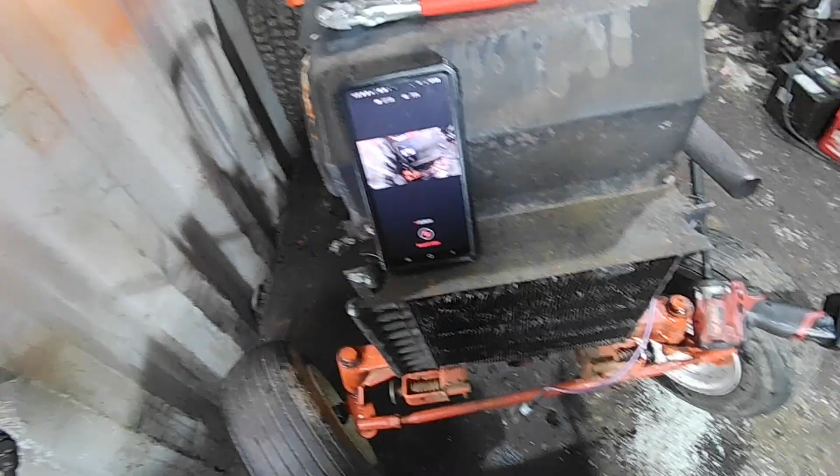Okay, today we're going to try to walk you guys through rebuilding and working on the Easy Adjust PTO clutch. This is the later version. This was brought out on most of the later 70s tractors and on forward until the electric PTO clutch. It's a pretty fairly simple design, but a lot of people get intimidated by it.

As you see, when we take the clutch apart, there's shims and washers and spacers, and they've got to be the right number, the right size, in the right order. And that could be part of the problem, people not getting their clutches adjusted and working correctly. So you need your parts manual and a parts diagram, and there is a service manual on this too. So we'll show you all that.

First thing to do is take your hood off. Don't think you needed to know how to do that. And then the coolers are going to be different for different years. Some are held on with screws and washers over here, and then some have bolts like this here.

This is going to be a little difficult because I'm using a head cam. I don't have a camera person today.

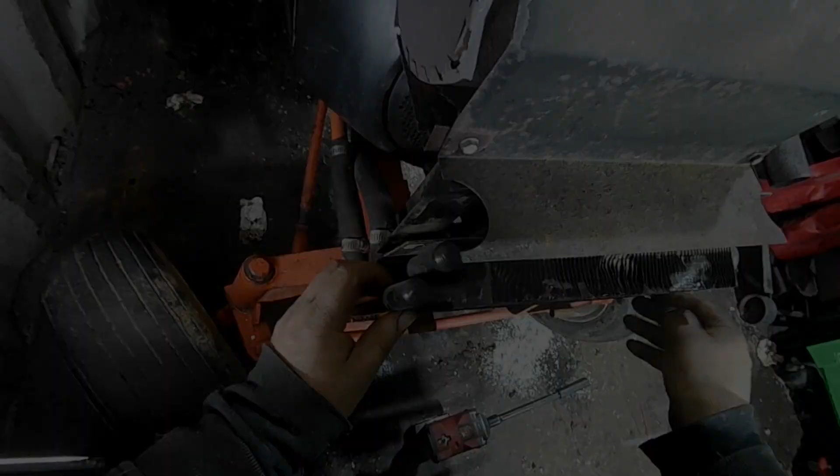Okay, so you don't need to disconnect these hose clamps over here. If you're changing your hydraulic fluid and plan on doing it, now's the time. You can disconnect this and get this really right out of your way. Now the next thing we're going to be removing is this upper bracket tower support. And there's different ways to do this.

You can get in here with the ratchet wrench and a wrench and do it. You can use a socket and a ratchet. And you can also use a wobble socket. And that's how we usually do them, wobble universal sockets.

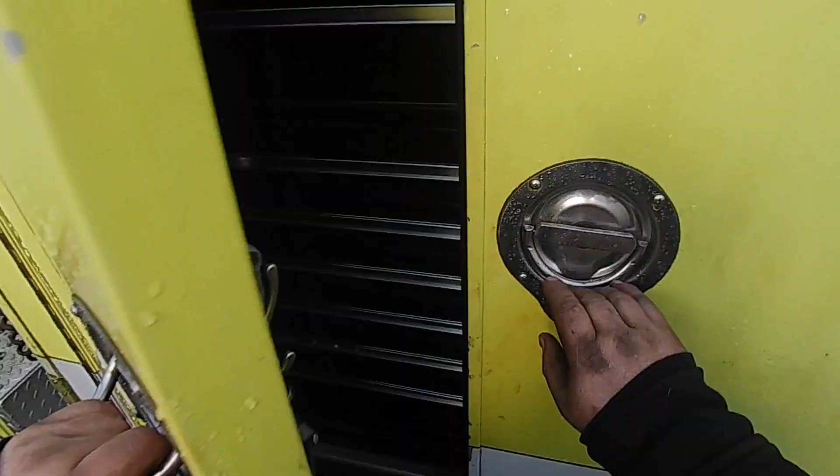So this is the wobble sockets we use to remove a lot of stuff that's tricky. And the extension, these are Sunex. They work awesome, lifesavers in a lot of situations, but use whatever tool you got at your disposal.

You don't have to take this all apart to get to this. For the video, it's going to make the lighting and everything easier, and it does make it a little easier working around here. But at this point now, you could go to the next step and start pulling this apart. But we're going to get this out of the way for the video purposes.

All right, hopefully you guys can see. I apologize again. Makes it a little tougher without a camera person, but all right.

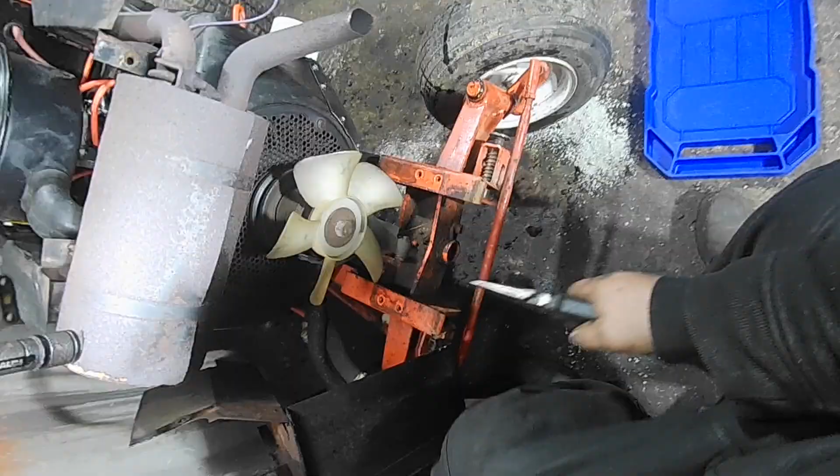So we got this shield and tower out of the way. Like I said, it's not necessary. It makes it a little easier. You got room, but doing it just to help get some light for you guys. So there's going to be a pin here that you got to pull out to get this linkage off.

Often there's a bushing in here that's got a lot of play in it. Can contribute to part of problems with PTOs. They get sloppy, the engagement in the rod. There's also, on this rod, underneath the tractor, a loop on most models that keeps this rod kind of centered. Otherwise, this will really go to the right or left, and you'll break things, and the PTO won't work if that's either broken or not there.

We've seen that often. Or this rod's not going through it. Somebody's monkeyed around with this, didn't put it back through the rod underneath. It's basically a guide is what it is. And sometimes these will pull right out, especially if the bushing's real bad. Other times they can fight a little bit.

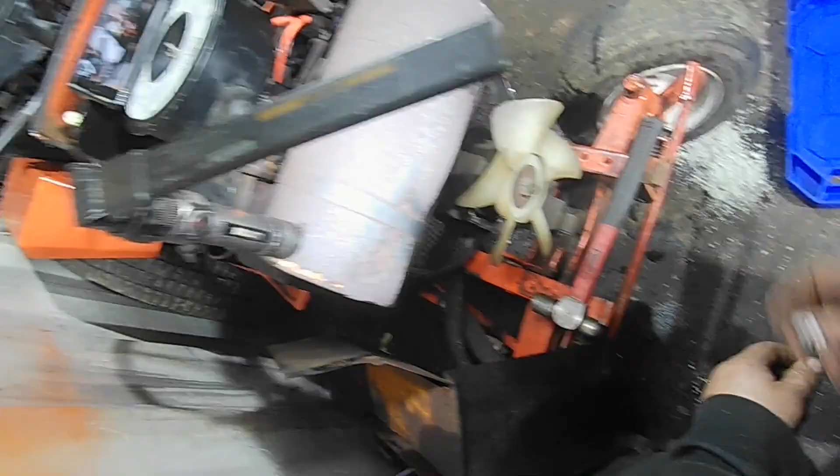The reason we're taking this one apart: when you start it up and run it and shut it off, the pulley spins here. Well, you can see it right now. It spins super easy. I should be able to actually start it up and show you. That's not a big deal. And you see it's still spinning after the tractor's shut off.

Those bearings are on their way out. Doesn't mean they're completely shot, but there should be a little resistance here. When bearings spin real free, there's no more grease left in them. And also, this is going to probably mean it's not set up correctly. The gap back here is what you go by.

Isn't real bad, but it wobbles. So it's not just some forward and back motion, but there's actual wobble. Those bearings are no good. The next thing is you're going to take this 3/4 inch nut off here. And the important part is, as you take this off, keep everything in order so you know how everything came off.

And saying that doesn't mean it was assembled right, because probably 60 to 70% of these we get in are assembled wrong. They're 20, 30, 40, 50 years old, and the PTOs have been messed with on most of them at some point in their life. And people don't always put them back together. Most of the time they don't put them back together the right way.

But by keeping it in order, by chance if yours is correct, it makes life easier. And if it's incorrect, then it also might let you know if you've got a problem with your PTO. It could be because something was put in incorrectly, or the wrong size was used.

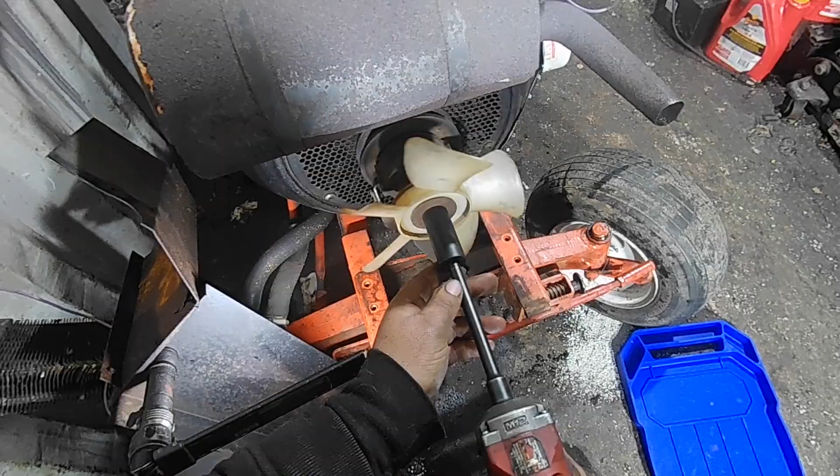So you got this big flat washer. This fan's actually in good shape. If your fan's missing blades, or they're real beat up, or they get brittle, replace them. Now's the time. But that one's in good shape. And we've got this spacer hub here. And then these are the spring washers. You can see them. They're domed.

So this lever is changing the distance between everything. And then it's putting pressure and compressing these. And the force of these spring washers is what gives you the pressure of everything. Then this is your big adjustment nut. So this is where the adjustment gets done. We'll do that towards the end of the video. But it's basically a nut inside of a nut.

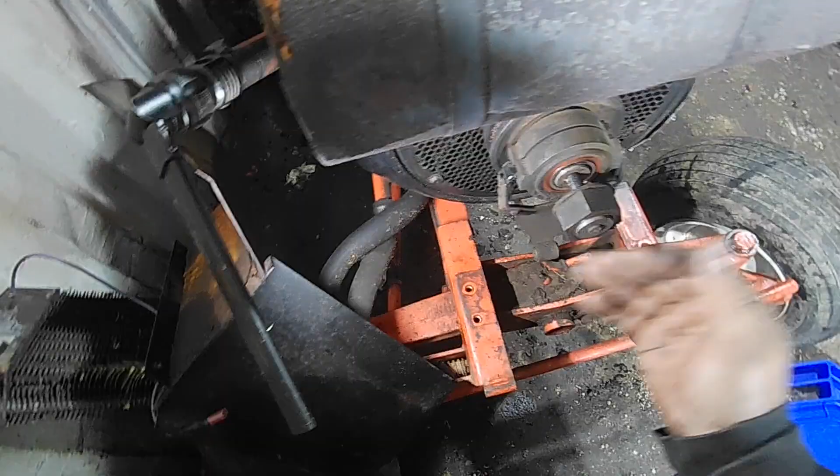And all the easy adjust clutches are not the same. Within each upgrade and year, model, generation, they've changed some things. They've changed spacers, they've changed thicknesses, they've changed the amount of things. So you really need to look at the manual that's correct for your tractor.

And with that said, it doesn't mean someone hasn't changed and put a newer or older one on. Also, a lot of the older tractors that didn't have easy adjust clutches, a lot of guys have upgraded to easy adjust clutches. So you got to kind of find what's closest to the one you have and hope for the best if yours isn't factory original.

There's this nut in here that's actually threaded that comes out through here, and this is where some of your adjustment comes from too. Well, most of your adjustment, I should say. When I said a nut inside of a nut, when you're adjusting, this slides in and out of here. And you got this big washer. A lot of times this will be worn. It is a spacer washer. This one's not too bad. It's got some wear marks, but it's actually not grooved.

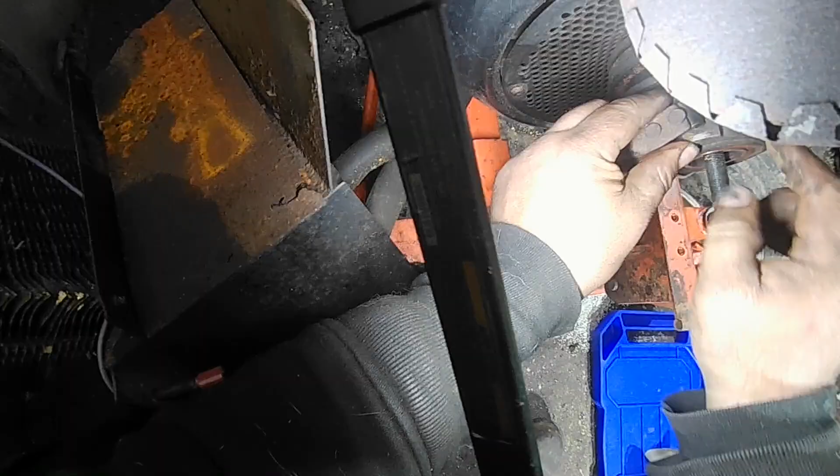It's pretty common that these will wear, especially if the bearings are wearing. But this one's actually not all that bad a shape. It's actually pretty smooth across. It looks probably worse than it is on camera, but there's 3 sets of bearings on these. There's a bearing in this one, there's a bearing in this one, and there's a bearing in your pulley. Those are 3 bearings.

These cams get offset. There's one side that's offset and one side that stays. So if yours are not offset on one side, then they're installed wrong and got to rotate 180 degrees. But right now we're pulling it apart. Note the way your fork comes off and make sure you put it back the right way from the way the book is. These people have put these in upside down numerous times and wonder why they don't work.

Alright, so here's our cam, and here's the bearing in here. So now I'm just gonna start a new pile. And then you got your shifter fork, or engagement fork, whatever you want to call it. So if these bearings are real bad, they'll wear a groove in this shaft here, and then sometimes you can't even get these bearings off here. They'll either weld themselves to the shaft, or the groove will be so bad you can't get them off. Sometimes you got to use a puller, but these are coming off all right.

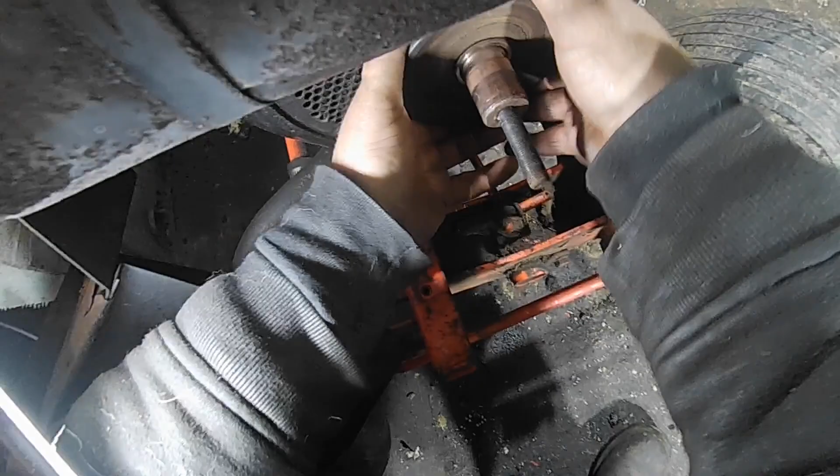Again, I can feel that they're a little bit rough. I don't think there's much grease at all left in these. Then here is your pulley, and note there's a spacer in here, and it's shined up, so that means things are moving in here. And like we said, you can see it, hopefully you can see it on camera. And when that was rocking, it was moving that bearing onto the spacer onto the other bearing, and they were wearing here, and probably took a couple thousandths off this thing, but we'll see.

And then sometimes these pulleys don't come off real well because the bearings actually wore the shaft. This one's not all that bad, actually. You may get away with being able to just get a little bit of lube on there and pull it off easily. Yep, nice. Alright. So, yep, this is the bearing that was shot.

That's spinning with no resistance. That means there's no grease in there. People will take a bearing and be, wow, that thing's good. No, no, it's not. It's good to blow up is what it is. It should spin easy, and there shouldn't be any inconsistency with the spinning and any roughness, but it shouldn't spin like that. It should have some resistance because the grease is in there. And as this is spinning, I can feel there's a rough spot or a worn spot.

So there's your pulley, and the pulley itself actually looks in good shape. These can get worn and distorted, belts wearing, belts sticking, somebody hitting something with an implement and not shutting the PTO off, and the belt will actually start wearing the metal. Usually the belt will break too, but these will wear.

And here's your friction disc. This is what does the driving. This disc's actually in really good shape. It's bonded here, glued here to this pulley. So we're not going to mess with that. There's a lot of life left on here.

And then here's your hub that bolts to the flywheel, and your clutch rides on here. And this is going to wear. They do. That's what happens. But they'll wear quite a bit. This one's barely worn. I can run my fingernail over it, and the reason it's wearing uneven, again, is because that pulley and bearing was bad and it was walking. So it was engaging and putting pressure on one side more than the other, and it should be even and equal. This we'll just clean up, same thing, maybe some emery cloth, sandpaper, just to rough it up a little bit and get it cleaned up.

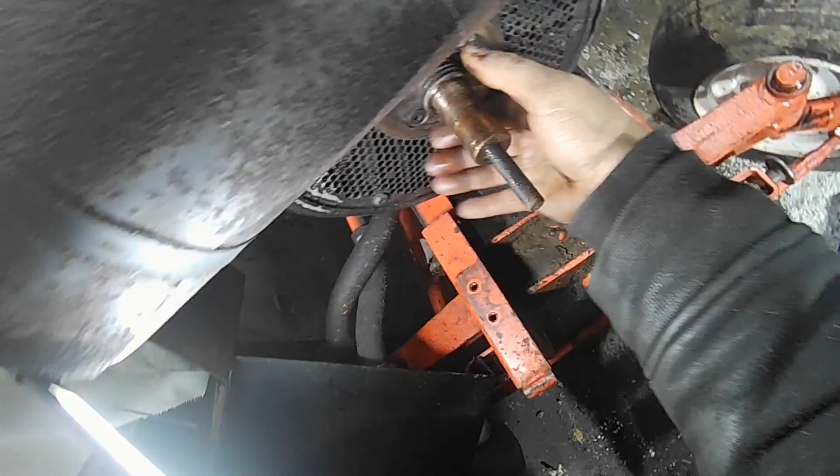And this next step is pretty important too, to see what you got going on here. These are spring washers, wavy washers, and shims in here. And this also is putting pressure when everything's expanded and compressed. This is putting pressure also on the whole system. So basically those big washers have to overcome the force of these little washers, these spring washers. So those big cam washers we were talking about have to overcome this, so that disc pushes up against here enough and the friction disc rides on there.

Why it's important that these are in the right order, the right number and right thickness, is because when compressed, they have to take up the gap in here and just leave just enough so your friction disc hits here. If there's too many in here, you can compress everything all you want, but this is gonna be too big of a space for this to ever hit the disc and drive off your flywheel, or off your hub, I guess is probably a better way to put it.

So if there's too many, no matter what you do, you can put all the pressure you want in the world. These are only going to compress so much, and physically can only compress so much. This will be too far away from the disc. And again, if there's not enough, then you're going to have problems, and this is going to walk back and forth, and it's not going to engage and disengage like it should. It's real important. That's why the thickness, the number, and the order everything's put together makes a huge difference.

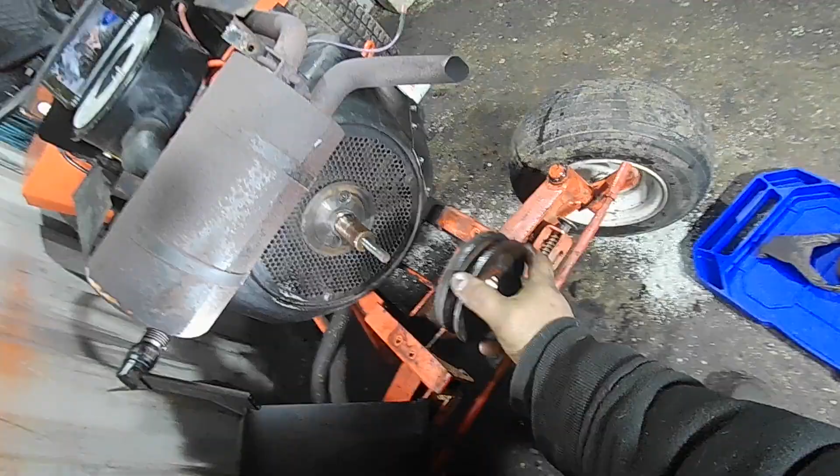I'm going to guess these might be pretty close to the way they should be. I'm just thinking that the bearings probably were not replaced. Somebody looks like probably put a disc on this at one point. The discs won't wear a lot as long as they're adjusted right and you're not doing a lot of dumb things. You start running firewood through a snowblower, this is what spins and gives. You might spin a belt or break a chain or something, but still, if that blower gets locked up, this engine is not going to slow down and stall. This old engine's got plenty of torque, and that's going to keep spinning. And if this is stopped, you're going to wear the disc out or wear this out.

Same thing with your lawnmower. If your blades don't go on instantly and stay at full speed, and they're slowing down gradually, it's because, more than likely, this is spinning. So this is not adjusted right, and you're not getting enough pressure on here. So the only time this thing should really wear, pull that lever to go and engage your implement, and this grabs for a fraction of a second and it should lock right in.

So this disc should last a long time. If they're wearing out, something's wrong and you're not adjusted right. This will still drive your implement at a very fast speed, but it'll be slipping and you won't really tell by the eye until you get a heavy load on it.

I've seen people go in high grass and the engine doesn't bog down or anything, and the blades are slowing right down, and they just keep on mowing and it comes out of the grass and the blades pick right back up in speed. Well, this thing's spinning so fast and you do have some friction material here. Yeah, it's driving, but it's not driving like it should. That's spinning way faster than this is, and you're just wearing it.

Same thing with blowing snow. If your snowblower is set up right and it's not throwing snow pretty far, especially dry snow, you should get 15 to 30 feet throw with a single stage blower, no problem. In dry snow, as long as you got it adjusted right and operating it right. If not, something's slipping. Chances are this is not adjusted right.

Blabbing about people not operating things, because we can make videos for 3 years and not cover it all.

So this has got a big spacer. Then it's got a small spacer. Hopefully you can see all this. Then we've got a wavy washer. I don't know if you can see that, but that's the spring washers, wavy washers. Got another one. And we got a spacer. So that's correct for most models. Then we should have 2 more wavy washers, which we do. And then a spacer. We do.

Now the key is making sure these are the right thickness, these spacers. And we'll have to look at the book. And 2 more wavy washers. So that looks like it was put together correctly, if memory serves me correct. Got everything set up there.

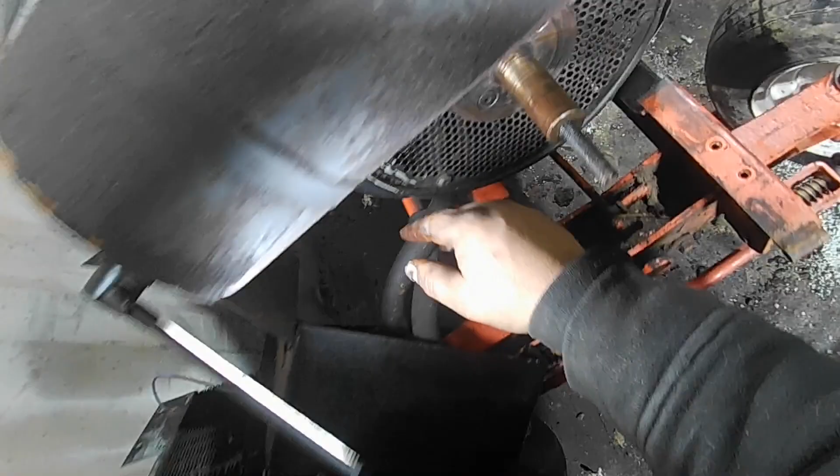We'll clean that up. Alright, so one of the first things we always do, and we do this with any sealed bearings, doesn't matter if they're going on these garden tractors or heavy equipment, farm equipment, trucks, stationary equipment. Bearings today, I don't care what brand they are, you can get Timkens, SKFs, American, Chinese, it doesn't matter. 90% of them don't have enough grease in them.

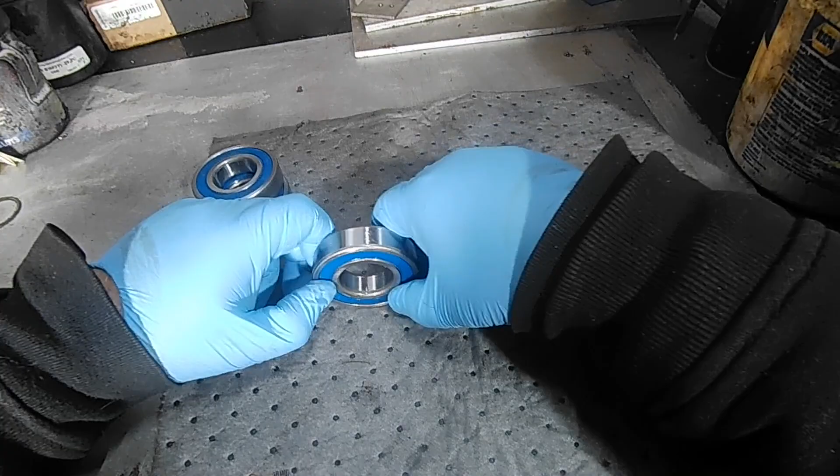We always just open these up, even though they're sealed bearings, you can open them up. We put good grease in them and then close them back up. We do this with every single sealed bearing. So they're very easy to do. You can take an O-ring pick or whatever you got, and you just go underneath the lip seal here, and you pry up. And that's it.

Now you look in there, hopefully you can see. There's grease in there, but there's not a lot. Right here, it's dry. These bearings are dry. I'm sure if we flip it over and do the same thing, it's going to be dry in spots. And once they get moving, sure, they'll get coated and they'll last a while. Just pop these open and try not to damage the seals. And again, look, there's not much grease in there. It's dry here, it's dry here, it's dry here.

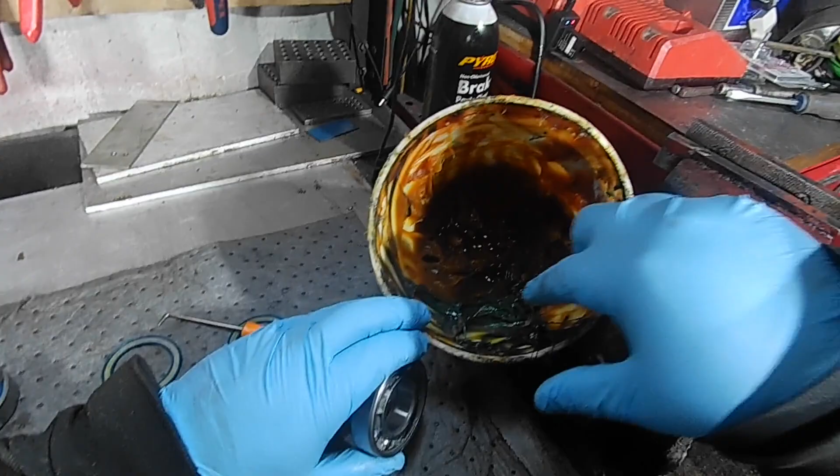Alright. Don't pay attention to the bucket. It says Napa grease, but it's not necessarily Napa grease. Instead of wasting the grease tubes, when you get done with our cordless grease gun, there's always a little bit of grease in there, and we'll just empty them off in here, put a lid on it, and it's plenty good grease. We use a lot of Schaeffer's grease and Red Line grease, and they're both pretty expensive, anywhere from $10 to $20 a tube. So if you can save some.

I'll just get that pushed in there nice. You don't have to go crazy. You don't need to do the palm of the hand method because there is already grease in here. Apply pressure as you're putting the grease in, so it just gets packed down in between. I'm not going to go through all three of them with you. Just wanted to show you the basics. And then just take your seals. Make sure you're right side down.

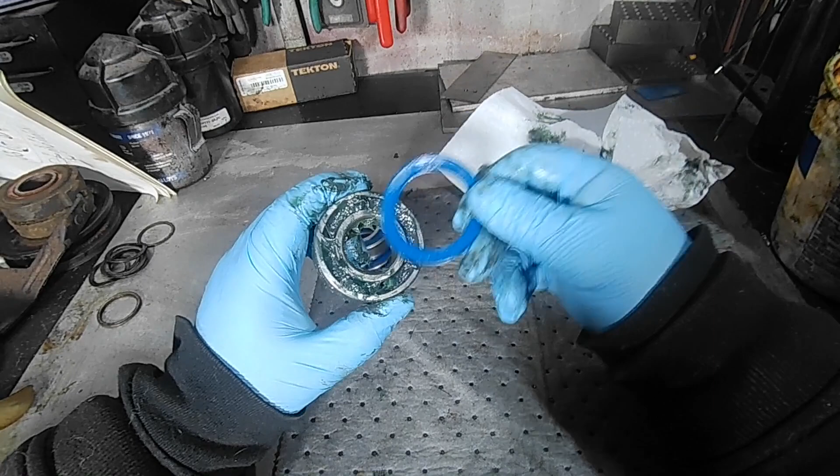And you just press them in there. Just walk them around with your finger. That's it. You can see it push some grease out this side. And then this is going to force the rest of it in between the bearings. Just make sure it's in there and doing its job to keep the dust out and the grease in.

Again, when you take them off, just be careful not to damage the seals. And now this bearing will last the customer much longer. Okay, so now we're going to show you how to knock out these bearings. You want to clean these things up here pretty good. That way none of the grime and stuff falls in when you're taking the bearings out, putting new ones in.

They can only go one way. I'm not sure if you can see that, but this outer lip retains the bearings on this side. On this side the bearing protrudes. This is the side the bearing has to come out. You can't knock it through this outer lip. So the bearing has to get driven down. Sometimes they'll pop out by hand, not a big deal. And other times they fight.

And if they do, usually they're not in there too bad. You can put them in a vise or whatever. If you put them in a vise, just make sure the bearing has clearance to drop and you're not driving the bearing down on the vise. And you want to be mindful that you don't break these ears or crack any of this.

You can take a piece of pipe or a big socket and drive on the race if they're in there hard. If not, usually you can get away with just tapping them. And they come right out. Make sure this lip is clean because the bearing has to sit flush in there. If you need to take a pick or a screwdriver to get any grime out of there, do it.

Pretty straightforward. And then take your new packed bearing. You can spray something in there, it doesn't really matter what, just to kind of protect it. So if you ever have to pull these out again, they come out nice and easy. WD-40, penetrating oil, a little bit of grease, anything. Motor oil. Sometimes these drop right in like that.

If they don't drop in, you can gently persuade them with the hammer, but the key with putting them in anyway, you want them to go in flat and level. If they go in at an angle, they'll jam up and they're not going to go in straight, and you'll damage them and they'll fight you. So you want to make sure this bearing is sitting as flat as can be

from side to side. And then you can either tap them in with the hammer if you need to, or if they fight a little bit. But make sure your bearing is straight from side to side here, that this clearance is pretty close. Obviously you're not going to get it perfect, but you want it to be close all the way around.

Then you can put it in a vise and just press it in if you need to, or a small press. Usually though, these will go in by hand or with a hammer tapping them. These bearings are the same both sides, so it doesn't matter. You can put the bearing itself in any way. So those were the easy ones.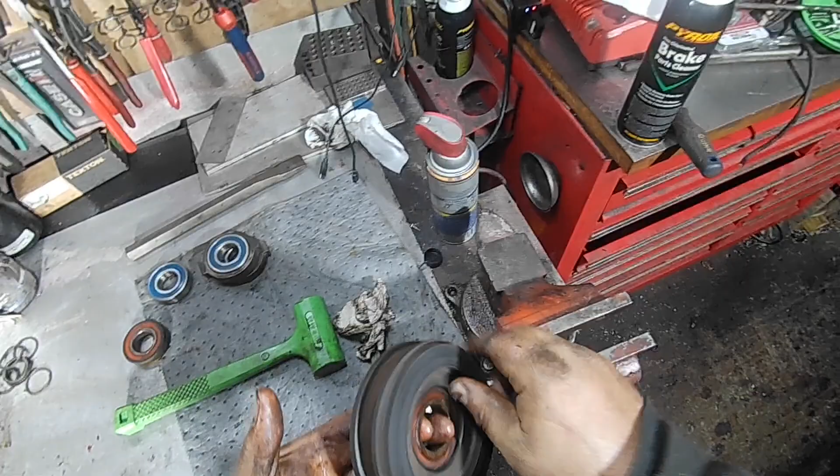This is the bearing that I think is, well, I know it's shot. It had all the play in the shaft, and you can just watch this thing spin around and spin around and spin around. I mean, that's very little effort to make it do that. Alright, so again, we cleaned this up already.

Your bearing's only going to be able to go in from one way. This bearing gets knocked out through this side. As you can see, this side, it can't come out. All it's showing is the seal. It's retained by this. So this bearing gets dropped down away from the friction disc. Again, make sure whatever you're hitting it against, you've got enough clearance for the bearing to drop and you're not hitting it on the jaws of the vise or whatever you're using.

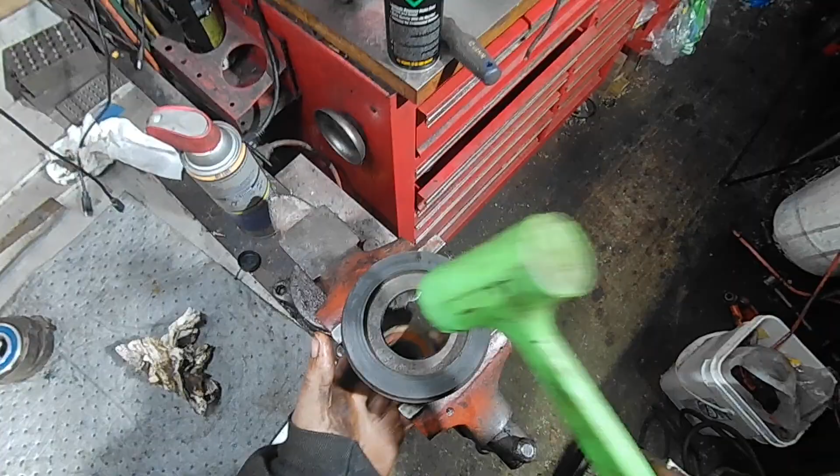And we'll see how this one pops out. This one's going to drop right out too. Not a big deal. If they fight, you might have to use a block of wood or a big socket or something. You just want to be mindful not to get any grease on this face. Brake clean's fine, but you don't want any grease on your friction disc there. Again, this lip, this face has to be clean so the bearing sits in there flat.

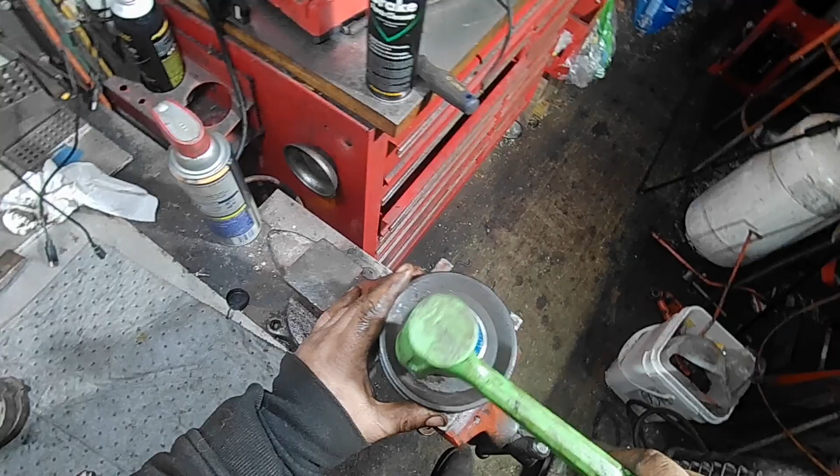A little bit of something in there, just to ease the installation and keep the rust away. Again, be mindful not to get it on the bottom where the clutch disc is. You want this bearing to start as even and level as you can from all four sides. And if you go hit them in with a hammer, better to do it with a softer faced hammer, dead blow. Hit it 12, 6, then 3 and 9. You don't want to hit all kinds of crazy things. You want to work them evenly, and then you can go around if you need to.

Now that it's down in there, you can do that. And that's it. The bearings are installed. That part's simple. Just make sure it's even on the back side. She's all the way down. So now I'm going to try spinning it like we were before. And you can watch. It doesn't spin nearly as much. Actually, quite a bit more force to do it. Before on the tractor, she was just spinning and spinning and spinning.

The housing looked good. We inspected that to make sure we weren't getting any wobble from wear in the housing and whatnot. The wear was actually coming from the bearings being worn. You can get wear in the housing or the outer races or the inner races of the shaft, but the wear was from the bearings.

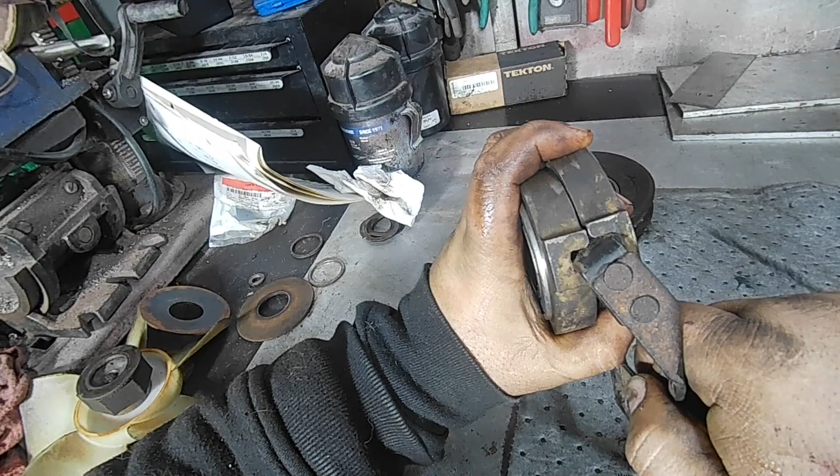Okay, so a couple things while we got this on the bench I wanted to show you. A few things you want to be mindful of. These edges of this fork should be rounded. They should not be squared, because this fork pivots, and it pivots in these cams. And when it's pivoting, it moves, so you want that to be rounded. You want this fork end to be rounded a little bit, not horrible, but definitely a little bit. These here are kind of straight and square, but this is what's moving, so that's where you want it to be rounded on the edges.

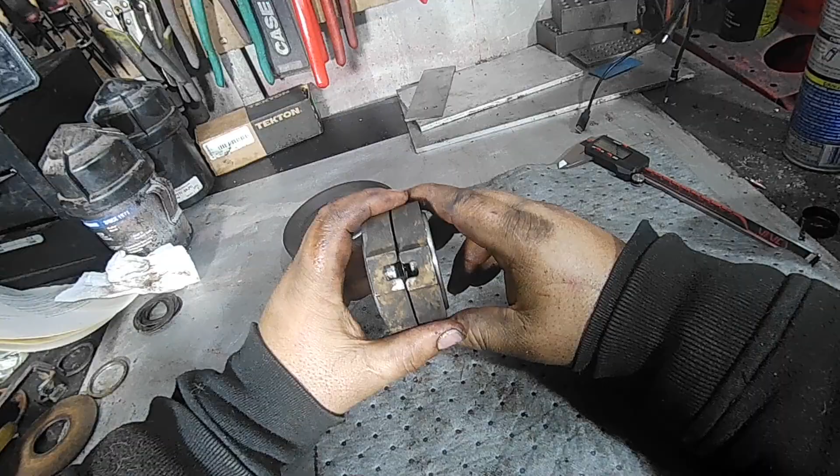Another thing, these need to be parallel across here. They can't be bent. They need to be parallel this way as well. Just something to keep in mind. You want to make sure you got a good bushing in here. If not, replace it. These, you don't want them too egged out. These are getting a little bit worn, but not horrible. They'll tend to wear in the corners, and you don't want them to wear in the corners too much, or this gap in here to get opened up and worn. But these should be absolutely fine. They're not brand new, but they definitely got life in them.

And then again, we're going to clean this friction disc up real quick with some brake clean, a little bit of sandpaper, emery cloth, just to rough it up a little bit. You want to get all grease and oil and contaminants off of there. You want this all cleaned up in here too, where your belt rides. You don't need to smooth it out too much, but you want it nice and clean.

Alright, so a few things I wanted to point out. Here's that clutch linkage rod. Here's this piece I was talking about that guides this rod that goes into your forks. Your forks here, here's that bushing I just showed you. So here's that loop. This rod has to be in that loop, and that loop shouldn't be broken or missing, because this rod will go back and forth. It'll flop all over the place. It'll screw up your forks, your engagement, everything. So you want to make sure this rod is riding through this guide.

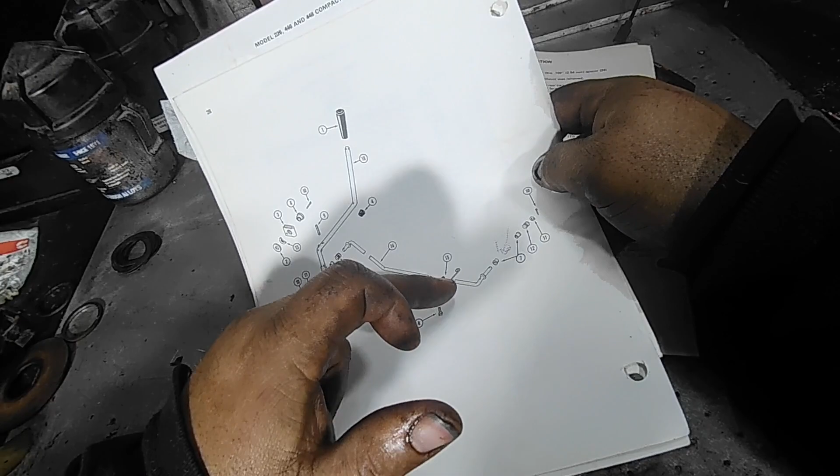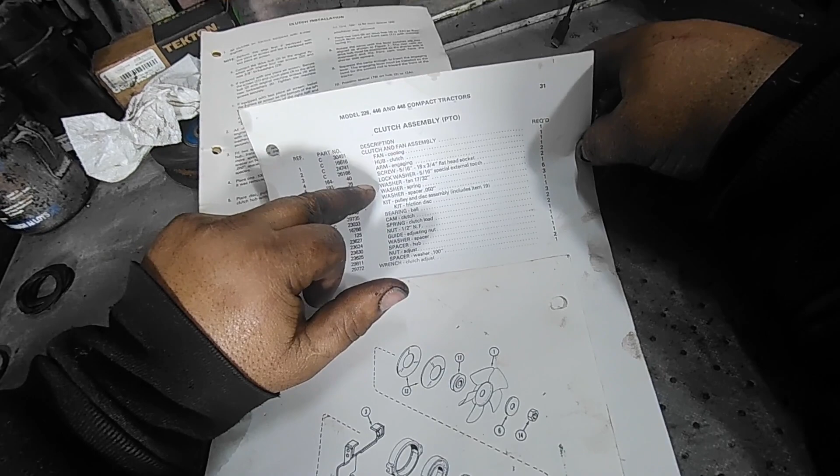Alright, and here's the breakdown for this particular year, the later series 448 late model. Each year, some of these components can be different, and they also can be different thicknesses. So that's why you need the parts breakdown for your particular year. It's very important. It'll show you the size, the spacer thickness, how many are in there, etc. This is a service manual for this clutch, and just to show you, it's going to be slightly different, because this is for a different year.

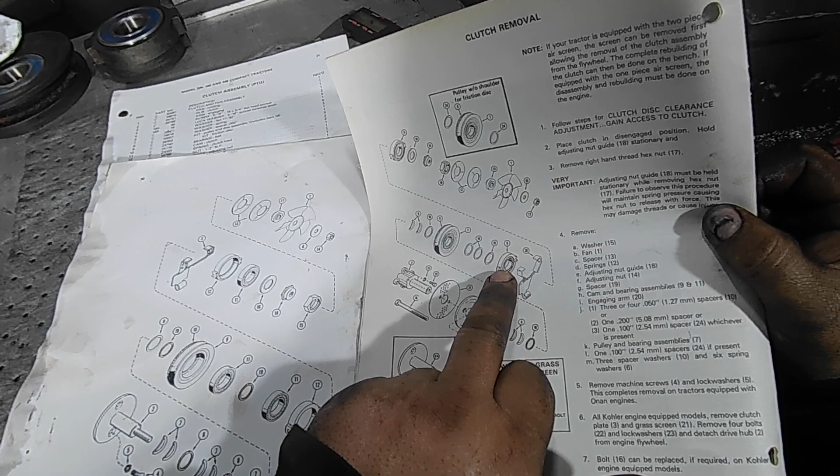If you look at this, behind the fork you got your bearing, and this is showing 3 spacers here. And in this repair manual, it says 3 or 4 at 0.05, or 1 at 0.200, or 1 at 0.10, whichever is present. Well, yes or no, because if somebody assembled it wrong or put the wrong kit in it, you're up the creek. So you're better off going to your year parts book. This year parts book's only showing one spacer in here, and that's number 19, and that's showing at 0.100.

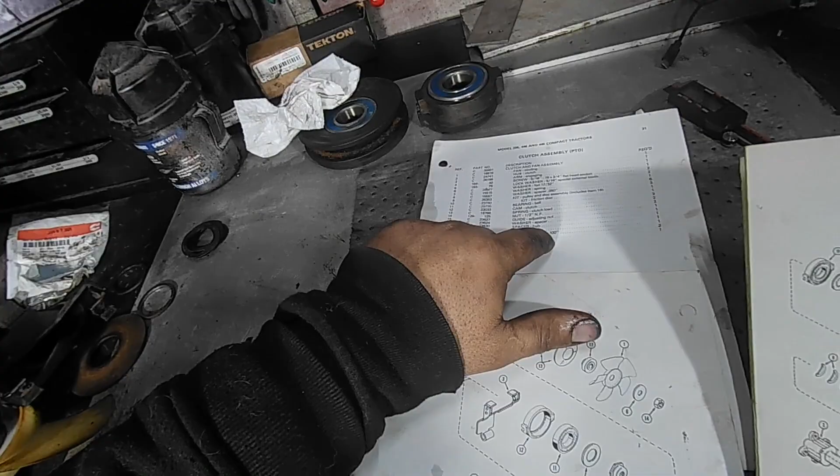And these change through here, just to give you an idea. So sometimes the spacers in front and behind here, these heavier ones, are going to show being different. The point is, get the breakdown for your particular year clutch. Okay, now we're going to go back to assembly.

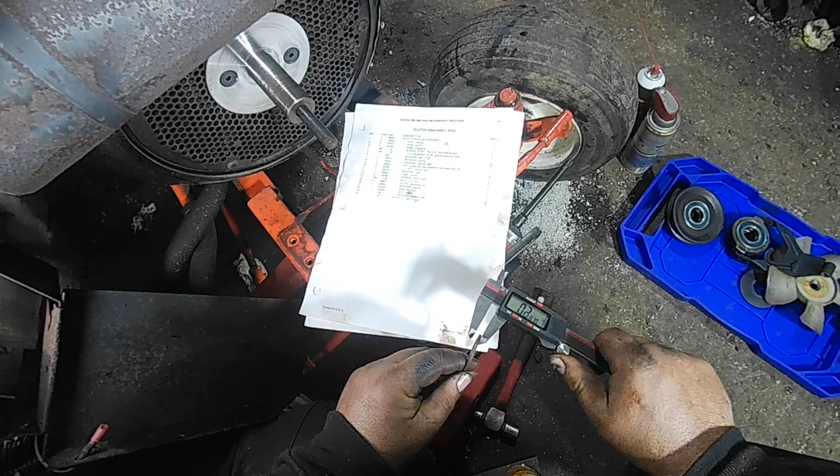Alright, we already went through and took the calipers and mic'd out our spacers, make sure they were the right size. We inspected all the parts and everything, spec'd out and checked good. So it's important you do that. If you are this far, we do recommend just replacing these spacers and wavy washers. These are actually okay, and they've got a lot of wave left to them. And then this wasn't the issue. The engagement and spring pressure and stuff was fine. And these spec'd out fine, so they're not worn. They're still straight. So we're going to reuse them.

This I don't think was the original set for sure. I think somebody's been in here. I just don't know if the bearings were cheap bearings. They didn't grease them, didn't replace them. I'm not sure. Either way, everything's spec'd out, so we're going to reuse everything, and all we do is replace the bearings. But if you're going this far, I'd order a shim kit for these with the wavy washers and the shims in there at the very least.

And those big clam washers, spring washers, those are good to replace sometimes too, depending on how much wear you got. But we're going to go back and start putting everything together. We've got it all kind of laid out how it needs to go. But we're going to follow our procedure here because that's the best thing to do.

If you notice, we cleaned this up here. So it's all cleaned up. It really didn't take much. The shaft wasn't really scored very bad or grooved out. Neither was this, just slight, but cleaned up. We didn't take it on a lathe or anything.

We're not going to show you the unrecommended, unsafe procedure of running the engine at an idle and lightly applying a piece of sandpaper to it, because it's dangerous. You can lose a finger, lose an eye. Definitely not the procedure we'd recommend you doing. Just do it safe some way. You could just take a piece of sandpaper with the engine off, and just go back and forth and clean it up. Or a die grinder with a Roloc or a Scotch-Brite pad. Those are good safe ways to do it.

Alright, now we're going to go through our assembly here. Let's see what we can get done. I'm sorry about the angle again. I don't have a camera person right now, so we're starting down here. But we already got our hub on there. We didn't mess with that. So it's showing 2 number 7s, and on here the number 7s are the spring washers. So that's what we're going to do first.

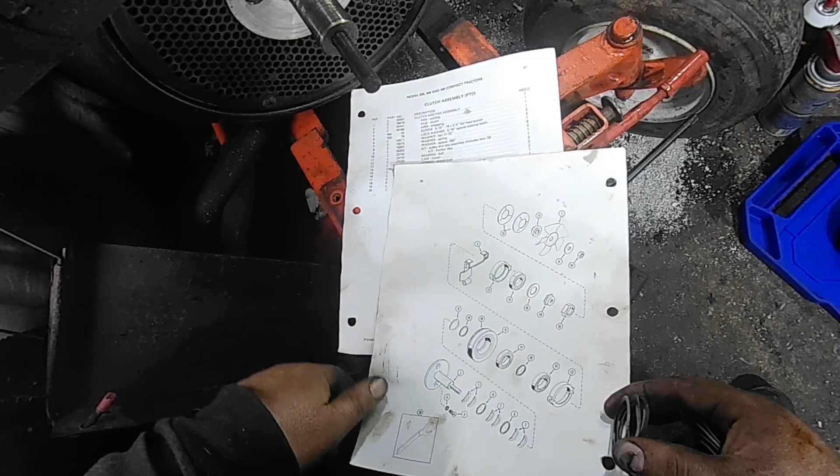And we took apart and cleaned all these off. You want to make sure these are clean. A couple different reasons. A, if they got stuff on there, it'll affect the clearance and tolerance in there. B, if there's grease and stuff on here, it'll get hot and it could melt and get onto your surface and your friction disc and affect the way it works.

Alright, so we're going to have 2 wavy washers here. It's 2 number 7s. And if you notice, they've got the waves in them. And I try to put the high points against each other, if that makes sense. Instead of having them fall in to each other like that, what I do is I try to put them against each other. Got our 2 wavy washers. So I want one of these, which is 0.05. And then again, we're going to go with 2 wavy washers.

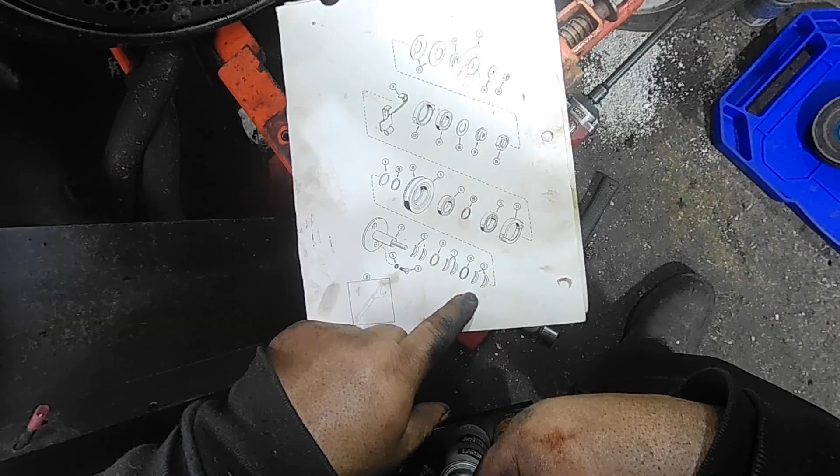So this is where we are now, right here. Again, I put them on with their high spots. And then I want one of those 0.05 spacers. And then we got 2 wavy washers left. So the last 2 wavy washers go on. And now we need to pay attention. We've got 2 spacers left. There's one thick and one thin.

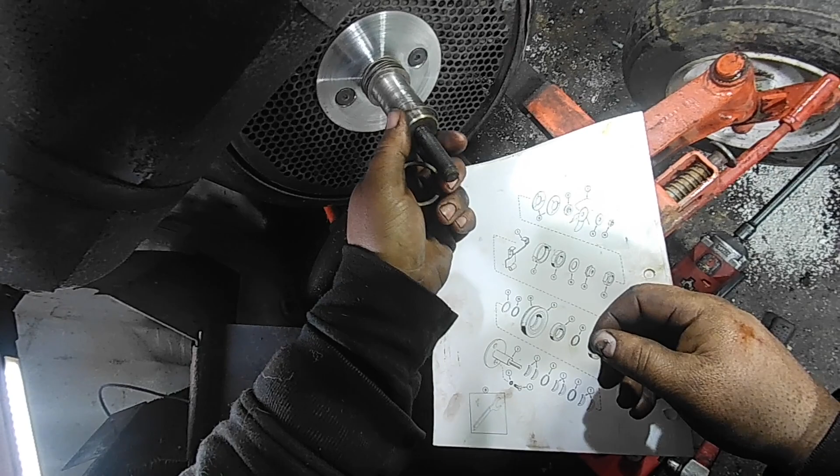So the thin one goes up against the wavy washers like it has been. Then the thick one goes. Alright. So 2 wavy washers, thin shim, 2 wavy washers, thin shim, 2 wavy washers, thin and thick shim for this particular year. And we've got our clutch disc here. So all we did was just take a little bit of sandpaper, emery cloth, by hand, roughed it up a little bit so it's got a nice rough surface to grab onto there.

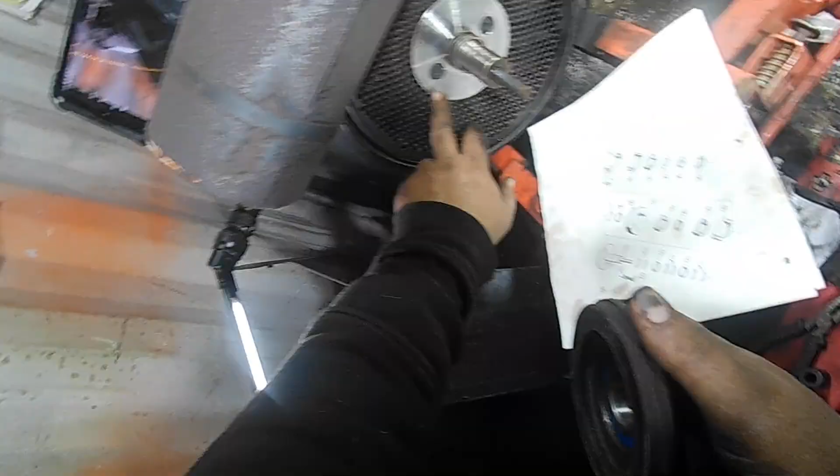Now when you're inspecting these, if these are glazed over, they're no good. If you're able to get the glaze off with some sandpaper and keep the surface flat, so you put the sandpaper down and rub this back and forth on a perfectly flat table or countertop or something and get the glazing off, it'll be fine. Same thing, you don't want the hub here over glazed. Usually a little emery cloth or sandpaper will clean up that hub.

Okay, so now we're on this step. The clutch material faces the flywheel and we're up against those washers. So now you can see how this works a little bit. When you're pushing the spring, those wavy washers are preloading it. The wavy washers keep this off of here when your PTO is not engaged. So it's like a preload. And then when you engage it, those big clamshell washer cam things put more pressure than these washers can hold and let that disc grab the front of the engine.

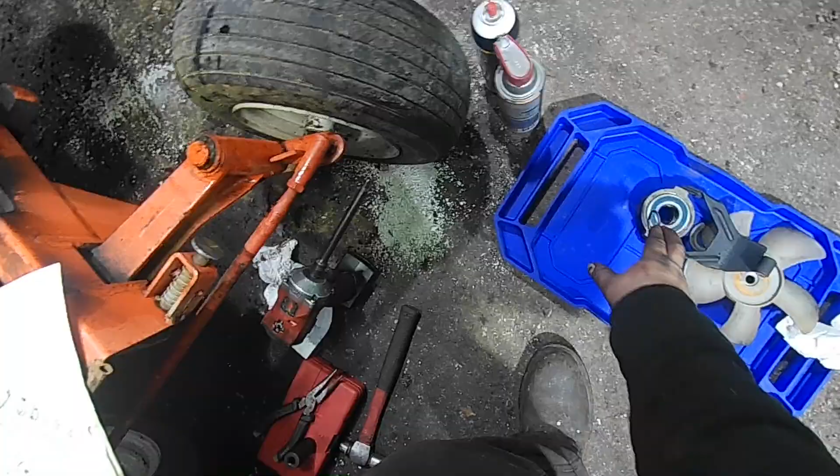That's why it's important that you use the right amount and the right thickness shims and washers in the back, so this can actually reach the flywheel surface. Well, we'll call it a flywheel surface, but it's really just a hub on the front of the flywheel. And then next, we've got one of these thick spacers, and that spaces between the 2 bearings. You got the bearing here and then the bearing on the forks.

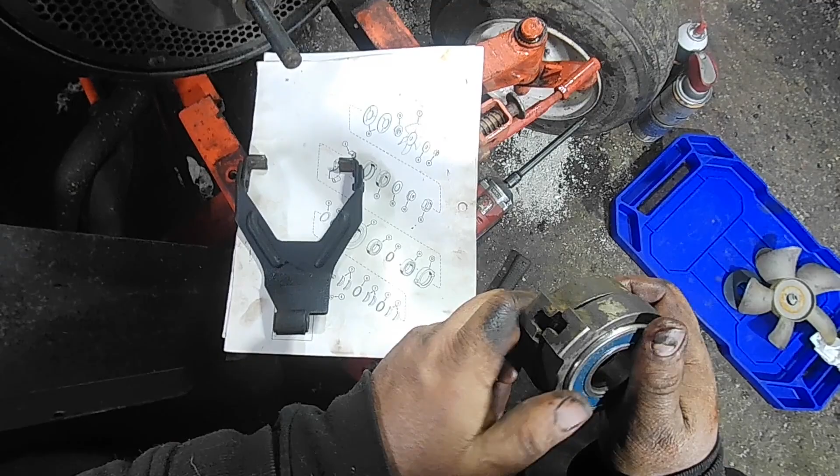Okay, so next we're here. We got the bearings already installed, our new bearing. This is going to be a little hard to show you, but we're going to do our best here. So the back bearing holder, the cam here, if you look at this side, it's lined up. This side's offset. That's what you want. If you take this and spin this around, this side's lined up and that side's lined up. That is incorrect. It won't function.

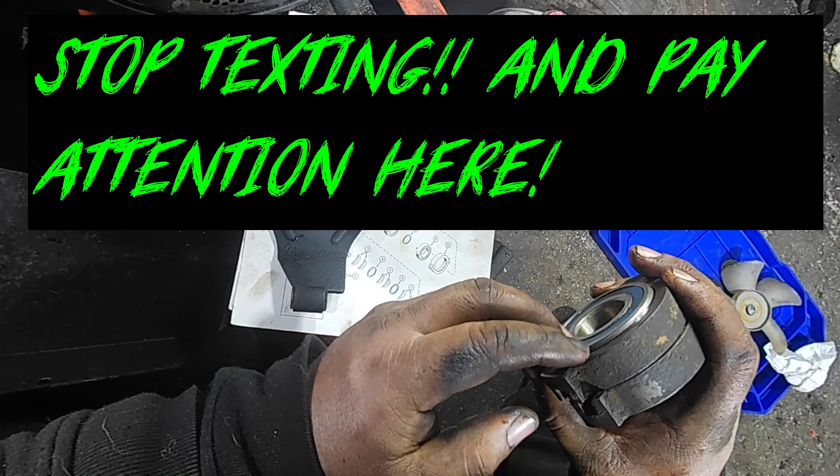When they're mating to each other, one side has to be offset. So what you do is you take one, you spin it 180 degrees. Again, you mate the flanges up to each other. And now we've got one side that's offset, one side that's not, and that's what this shifter fork does, and that's how it applies the pressure. Now what you want is the bearing holder in the back, the side that's offset, you want the back one lower than the front one. So again, this side is lined up, this side is offset, this one is your rear one. The back is lower, the front is higher.

Since we cleaned this up, right before this step, it doesn't hurt to put a little bit of spray on the shaft here. It doesn't hurt to put a little something on there, plus it'll keep the rust off. I didn't want to get any grease on the mating surface of the flywheel and the friction disc. This side's off like it should be. The lower side is the one you want in the back. Sits in there nice. And then you're going to take the front and make sure you didn't rotate it. Slide the front on partially.

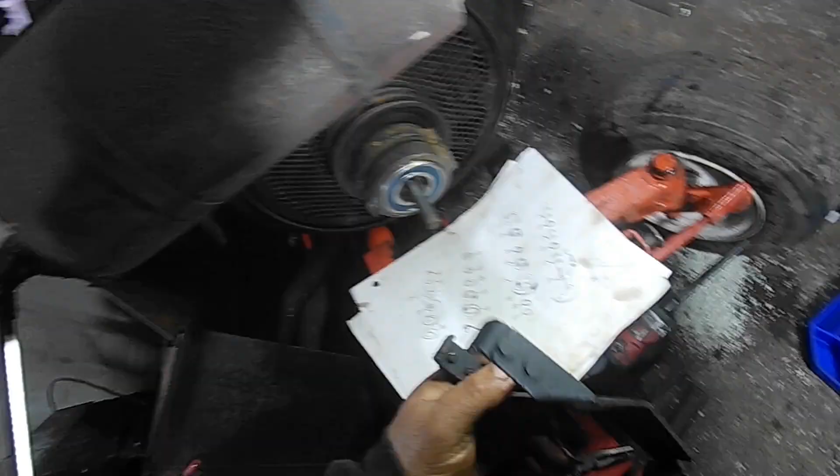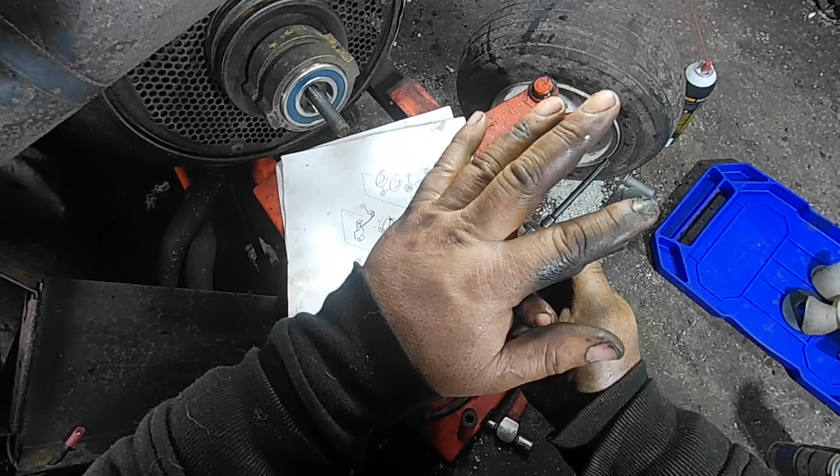And now we've got our shifter fork here. Here's this bushing in here that's plastic. Even though it's plastic, I recommend putting a little grease or lube in there. It makes inserting it easier, but it also makes operation easier. You'll get a lot of dirt and dust and grime in here, and these do wear out quite frequently. And the shifter forks can go on backwards, and they often do. But the way you want it is the bend of the fork facing forward. So the fork is going to bend forward.

Another way to tell on most models too is that the bushing holder is rolled forward. So you want the bushing facing forward, not back. Not like this. You don't want the bend backwards, you want it like this. So the bushing is on the front side and the bend is forward.

What you do is just simply put this between the forks. You just insert it between the two cam plates, and then you can just take this shaft, usually the rod, and it'll usually work right in there. Most of the time, if they're not beat up and the bushing is in decent shape, they'll slide in with just slight resistance. Install your new cotter pin in here. Okay, so we got that. The bearings are all in there, the cam's in there, the fork's in there.

And next we have this big thick spacer here. Just flip it over, and then this side will ride against the bearing this time. And again, put a little grease or a little lube on here, which is absolutely fine to keep the rust off and a little less friction on there, and that rides in there.

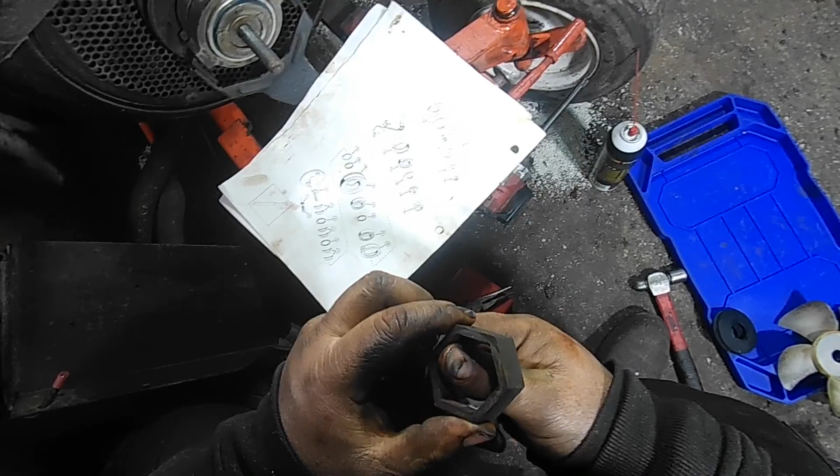And now we go to our nut and our adjuster nut. These definitely clean up a little bit, because inside here needs to be smooth and clean and lubed up, because this guy slides back and forth inside that big adjusting nut. So the cleaner and the smoother he is, the better everything is going to adjust and work. Same thing with this round spot. You want this clean and smooth and lubed up because everything's still got to slide. And then the threads, of course, keep some kind of lube or protection on them.

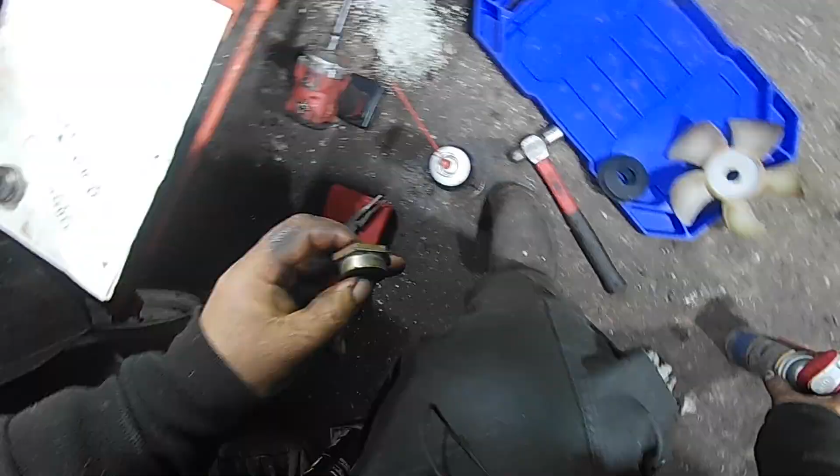I'll run that back and forth a few times. Make sure it's nice and smooth. See that moving? Like this. The hub facing out. Alright, before you send this nut in, you want to make sure this washer here is riding up on this little bit of hub that's still sticking out. It's imperative that that's on there, sitting on the hub, straight and where it belongs. And then just take this and lightly get it on there so it gets up against that washer. And that's where we're going to stop right now.

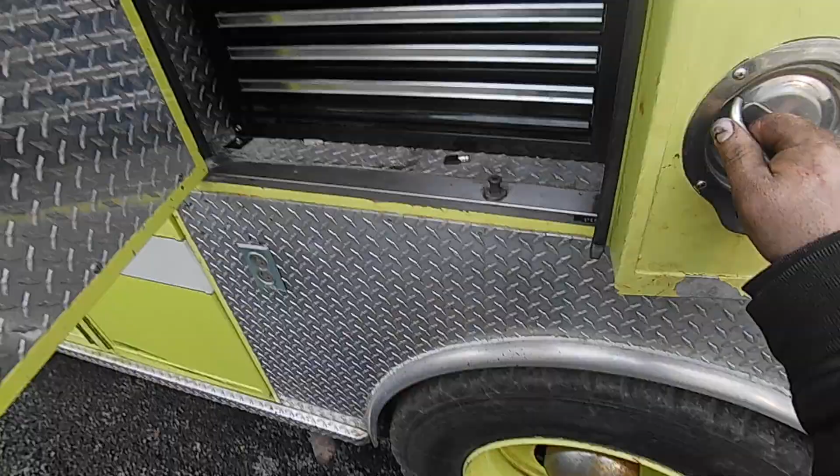For your next steps, you're going to need a 1 3/4 wrench or adjustable wrench or whatever you got that can turn this, and preferably a torque wrench. It really should be torqued, and a big set of feeler gauges. You can get by with other tools. I'll show you how to do it, and you use what you got to make it happen. You go out to the service truck, and so you need a set of feeler gauges. Use what you got. These big ones will work handy. I'll bring this set in too.

And then we need a torque wrench and a 1 3/4 wrench. Let's see. Got our torque wrench, and we need a 1 3/4. Should be right out here. Here it is. I'll take the angle wrench. And while we're at it, let's take the service wrench.

Okay, so the next step's a little specific. We're going to take this spacer and then these two big spring washers. What we're going to do now is I just send this in just to seat everything. Just turn it, you don't have to go crazy. Just turn it enough to where you're turning the flywheel. Then you're going to want to back it off. Okay, so that stuff's seated. Back it off until you get a lip with this hub coming out.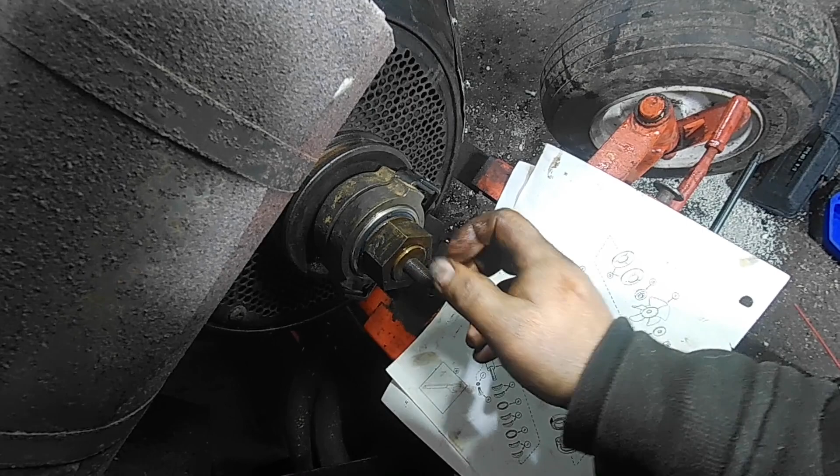Again, this washer in the back, you want to make sure stays on that back hub. So hopefully you can see this hub is now sticking out a little bit. That washer's still seated on the hub behind it, and everything's seated because we just tightened it up. Then we're going to take our clamshell spring washers, whatever you want to call them. The one's going to ride on that back hub. Alright, so you see how that is? It's riding on that hub that's sticking out.

And then take this one, and this is important: this can go both ways, and there's a right and a wrong way. The bigger diameter hub goes towards the back where this washer here sits in. Alright, this is wrong. That's right. Now you want to keep all this centered. You should be able to push side to side, up and down on these clamshells. They should not move. They should be sitting on the two hubs, the back hub and the front hub.

Okay, so this next part can be slightly tricky, but there's a small hub sitting on this piece that we just put on, and this fan rides on that small ridge there. There's a small ridge. The fan can go on backwards too, and you don't want to do that.

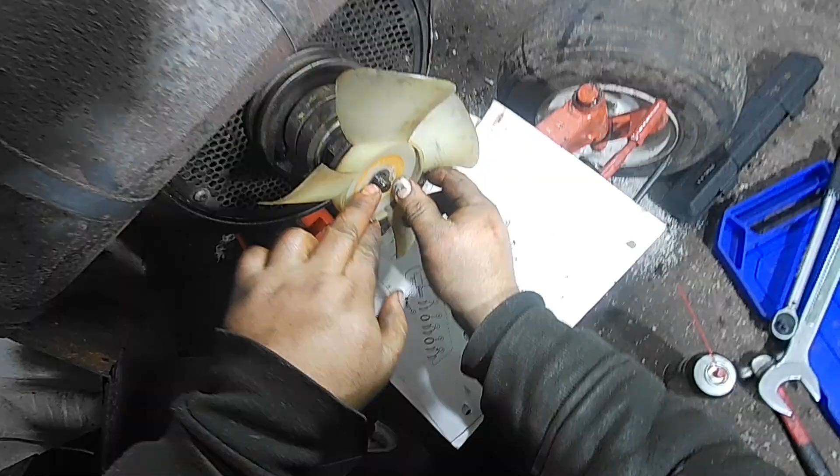The correct way is the blades are coming out facing towards you, facing forward, if that makes sense, and the fan is actually offset a little bit, so the smaller lip goes on the front, the bigger lip, the deeper lip goes in the back, and it should rest there. Again, make sure everything in the back has stayed in place.

That big washer, I know it's tough to see, but the big washer behind the nut, and then the two clamshell washers are sitting where they need to be, and they can't move around. Then we've got this big washer. Again, we just painted it, not a new one. The nut is new. Don't need to use a new one, but we do. They're fine. This one's grade 8, but that's only because that's all we stock and use grade 8. The hardware is pretty close to being the same price.

Alright, now just kind of get that on there, snug it up, and then we're going to take a look from the side, and maybe it'll make some more sense. This nut will get sucked in there more. What we're going to do is you're going to measure this gap that's back here. Hopefully you can see that. So the gap between this friction disc and the flywheel hub, right here. That's what we're measuring on both sides.

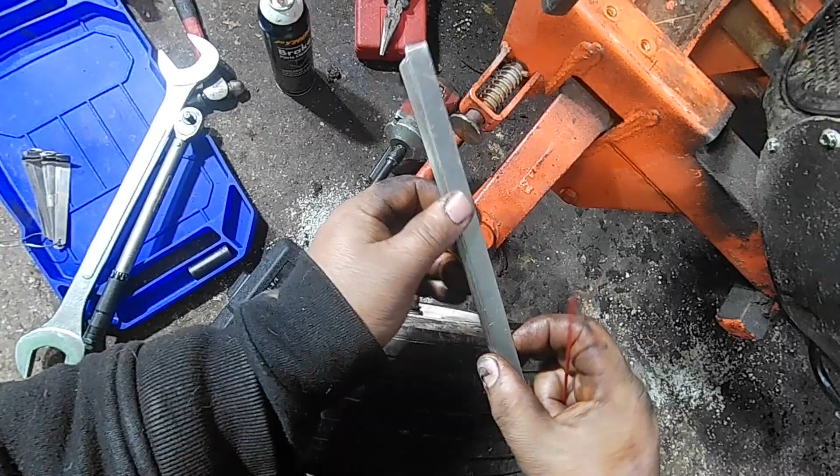We're going to use our feeler gauges. We got this big Proto set. Works for a lot of stuff we do on some of the bigger equipment. They're handy to have for a lot of stuff. Some 0.002 to 0.007 thousandths. I kind of like to go a little bit more with them, but the key is basically so the disc isn't touching that flywheel hub when it's not engaged. That's kind of the main thing here you're looking for.

But right now, you can see that, and this is just sloppy as heck in there. You can fit a quarter in there. And this is checked when your lever is all the way back towards you, disengaged. Okay, so we want to get it adjusted so this has some resistance and drag on it, and I'll go around and show you how to do that from the front again. And the reason I like these long ones is that it goes all the way across the disc on both sides, and you want the same clearance on both sides.

Now that this bearing was worn on the old one, the disc was probably wearing a little crooked, and to get an exact equal amount on both sides is probably not realistic. The disc was not real bad when we checked it, but it was off, and we're talking thousandths here. So the key here is to make sure this is not touching the flywheel when the tractor is running and the PTO is disengaged, and that it engages with some resistance but not overly resistant, because you'll bend and break the linkage in the rod.

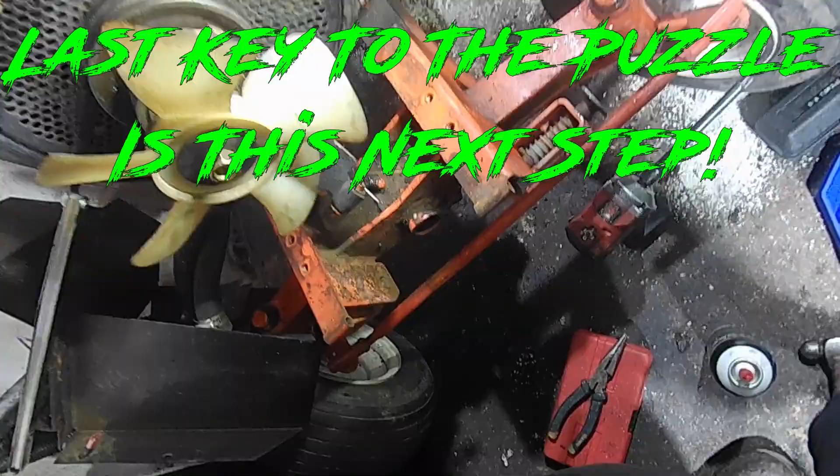Case Ingersoll had a special wrench they sold, and what you do is you get the big 1 3/4 on that nut in the back, then your 3/4 inch socket or wrench or whatever you're doing on the nut in the front, and you work these together. That way everything stays where it needs to be and nothing comes apart. And as we're turning these nuts in, we're pushing that pulley backwards towards our friction disc and closing up that gap. Again, you want to make sure your PTO is disengaged right now when you're doing this.

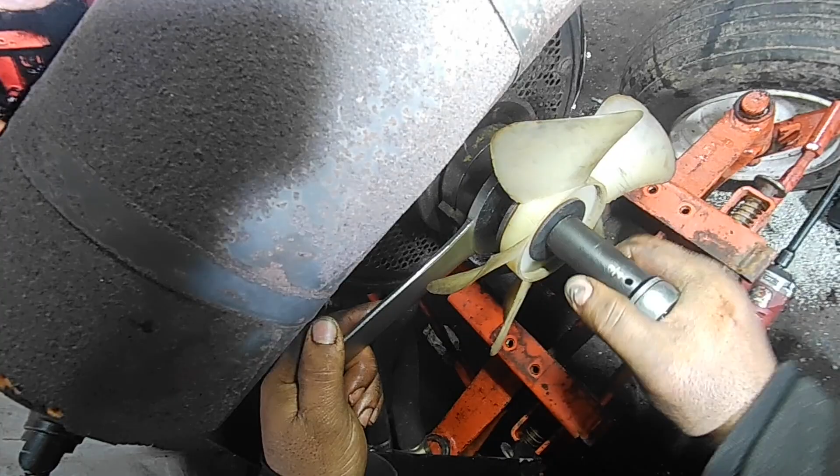You just keep tightening that one and then tightening this one a few turns. Tighten the big one and then tighten this one a few turns. When you want to stop is when you can't spin this pulley by hand anymore, and it's hitting this hub in the back. So as you're turning the back one, this front one's kind of loosening to some degree. The space is changing, the gap is.

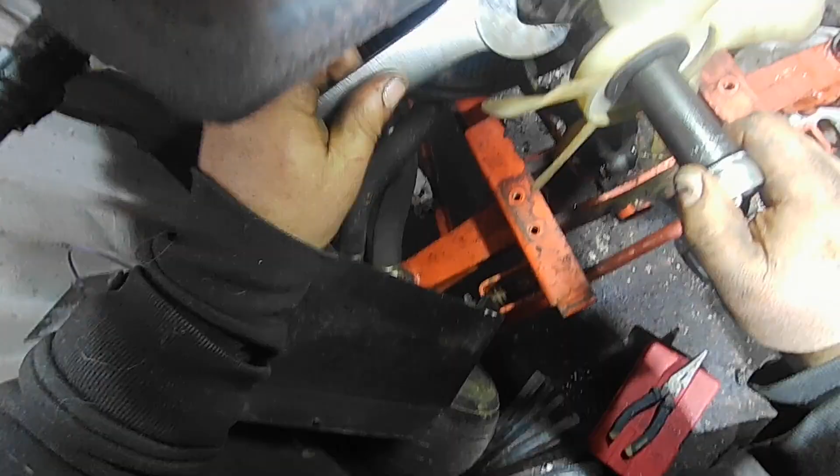Alright, so right now, you probably can't see, but I've got some resistance on this friction disc. It's hitting back here. I couldn't get a feeler gauge between there if I wanted to right now. There's no clearance. Alright, so now what we do is take this big nut, and then now we're going to back it off a few turns. With that, let's see. Yep, now it spins.

Let's take the feeler gauge and check that out now. This is just the gap here where we want to get. See that? But you want to send your gauge all the way through if you got a big one, or go around both sides and check. And there is some resistance here. It's way better than it was, but it probably can get tightened up a hair.

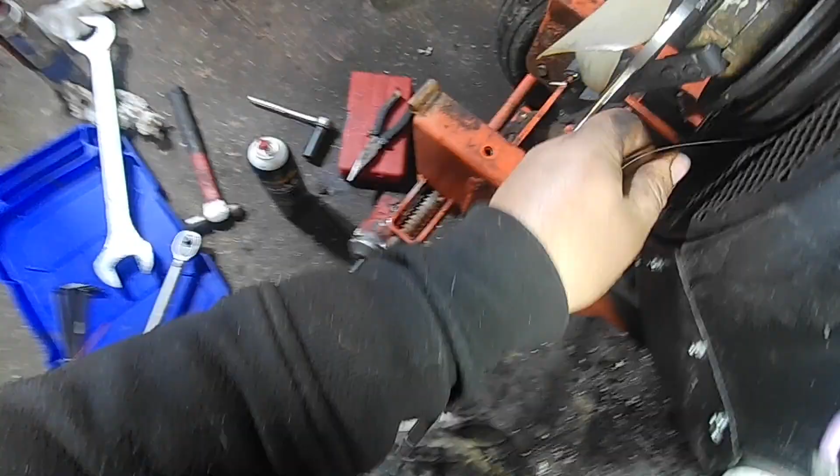Big nut, tighten it up just a little bit. Right now, the feeler gauge has more resistance on it. And you don't want to go too much without tightening the front because they got to work together. So now, just put your 3/4 in the fan. I'm going to pull this out and see if I can spin this. Now the pulley spins by hand pretty good.

I think it might be a hair much. Back it off a hair. Yeah, that's better. And it goes all the way through. You can do it on the bottom if you want. You can do all 4 sides with the whole.

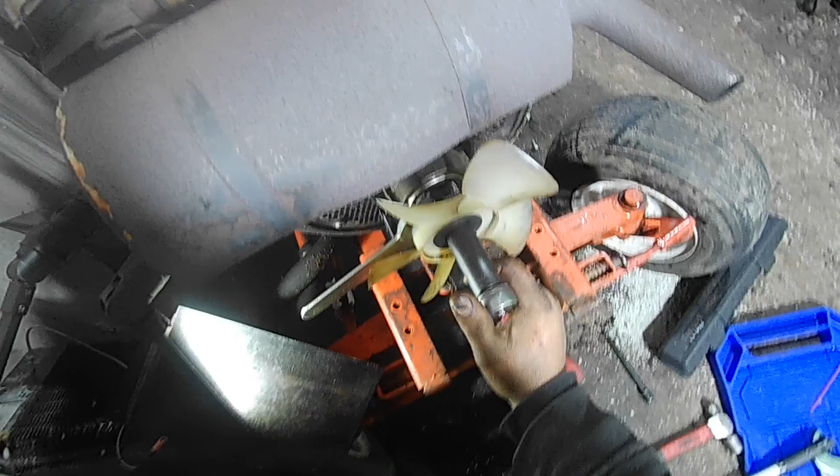Okay, so now that we set our gap back here with the feeler gauges, normally what we'll actually do is set the gap to about 10 thousandths, because when you torque this up and tighten it up, the clearances tend to change. It's just kind of the nature of the beast. Not every time, but usually 10 thousandths, if it stays open, is fine too. So that's kind of usually what we do. We'll set it at about 10 thousandths, but I wanted to show you what the book said and show you how to do it that way. And you can do it either way and start it, that's fine.

Now what you're going to do is get your torque wrench and set it to 45 pounds. And you're going to put your 3/4 inch there, and then you're going to want to hold that big adjusting nut in the back, if you can hold it with whatever you got. And then you'll feel this starting to grab, and it's going to want to turn the flywheel and the wrenches and everything. You can see that or not, but it wants to turn the whole thing. And there we are. That's 45 pounds.

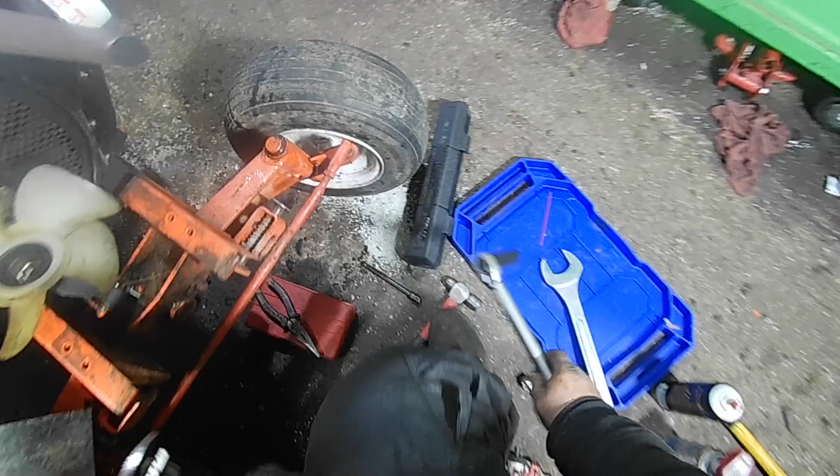So at this point, you want to spin this, make sure it's still free. Engage your clutch. And you want some resistance, some force to do it, but not a ton. You don't want it to feel like it's going to break. And you want these distinctive clicks. It feels alright, but you need that distinctive click, and you want to make sure you get that last one. There's the handle, and that's what it's doing. It's camming over, so you got one click that's going to open and then lock it. And again, right here, spins. Engage, you can't do nothing.

I'm going to take my feeler gauge. I got one of these nifty 90 degrees. It works fine too, whatever works. It fits on this side. I'll go over here. You want to be roughly 180 degrees opposite from each other. So that one's in there like that.

Alright, so we set this at about 10 thousandths, and we just checked that with an 8. So it's a little bit off, but it'll be fine. It'll work absolutely fine. But you can do whatever you want. And make sure you cycle your lever a few times though. That's how you do it.

To do it without taking everything off here. Not necessarily the recommended way to adjust it, but it'll get you out of a bind if you're mowing your lawn or snow blowing and you need to finish and you can't take all this apart right now, and you can order your parts and rebuild it next free time you get. We've got a video showing you how you do that with the easy clutch without dismantling the whole tractor. Basically field adjustment.